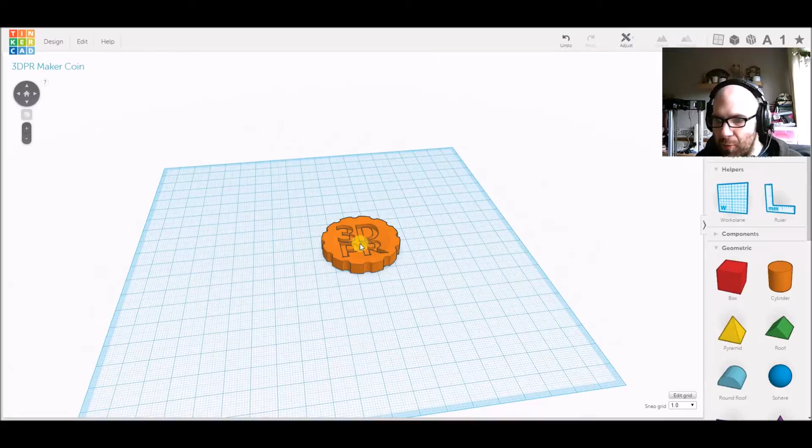You might have just seen there briefly as it loaded up. So what I'm going to do is duplicate this design here, and that's just going to open a copy up so that we can have a proper play with it.

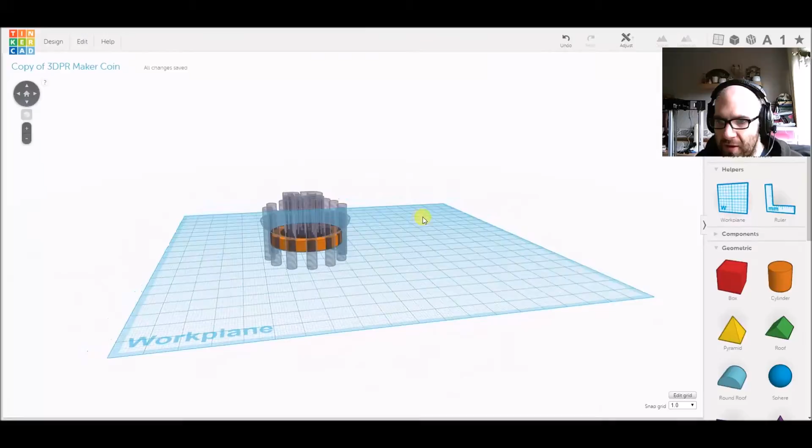So if we ungroup that, then you can just see all those. Okay, so that is basically what goes into making our coin.

So what I'm going to do is basically work backwards. Let's take the first thing, or the last thing that we added, and that was the dish shape into the top of the coin.

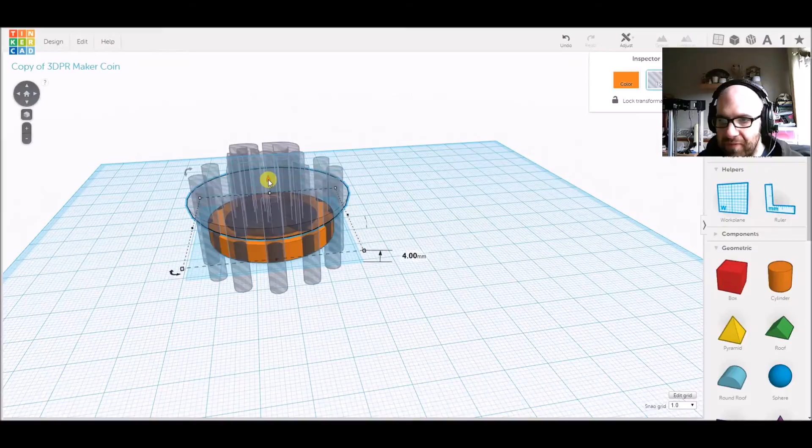I'll show you a picture of the finished coin after I've gone through all of this, because I've already printed it. So if we just raise that up, you can see what that looks like.

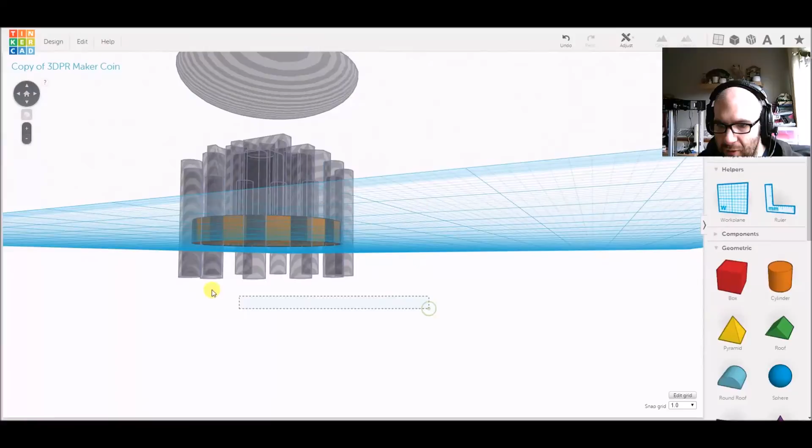The next thing we've got here is these tubes, or the cylinders, and these are actually in pairs. So if we try and select all of those, what I'm actually going to do is group them together. If I group them together, there we go, that's fine. So I've grouped those together.

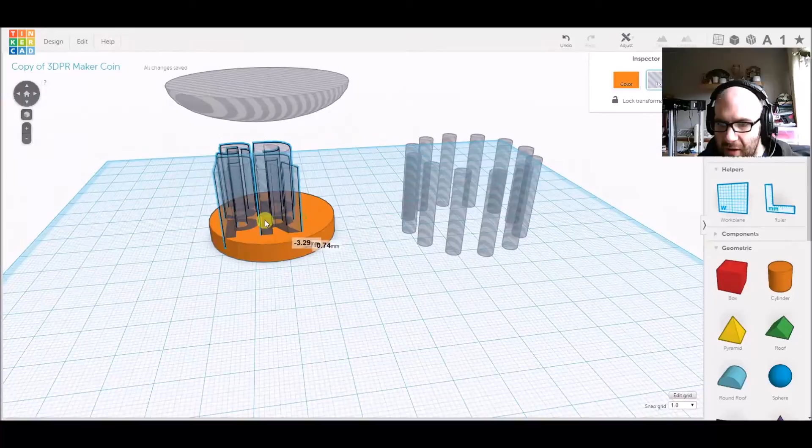Let's move those out of the way, and then we've obviously got the actual logo for 3D Printing Reviews. So let's move that across as well, which just leaves us this original disc that we started with.

So let's basically put those things back together, and you'll see what the finished coin looks like after we've added them in. So let's undo.

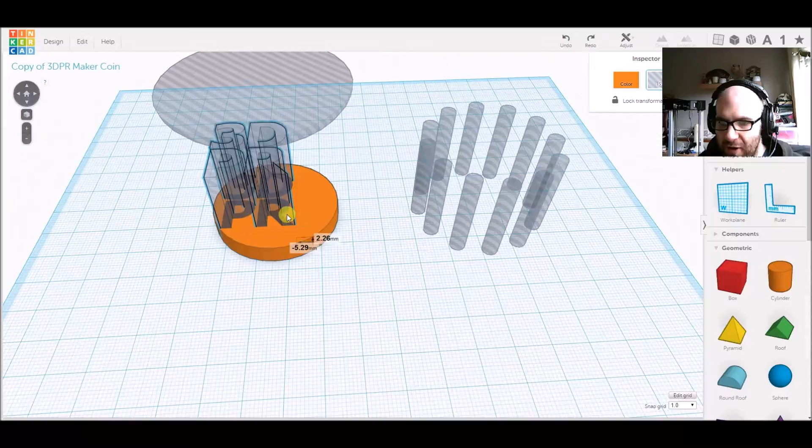So we've added the logo back in, and actually I'll just show you a quick feature that I sort of knew about but never really used until I watched Chuck's video.

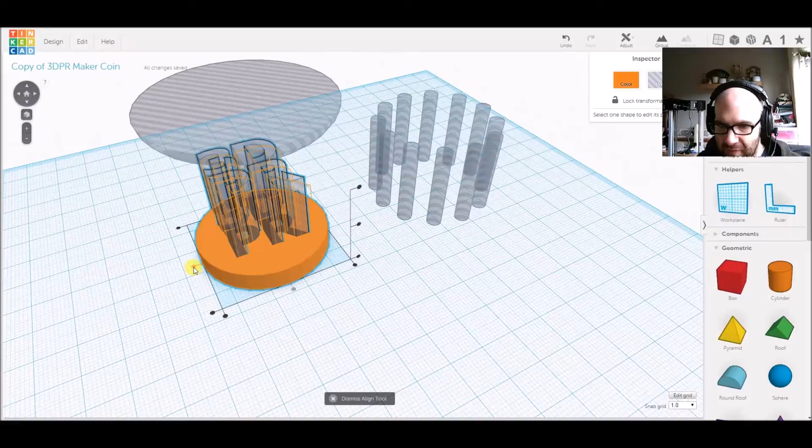So if we select both of those and go up here to align, and then align again, it brings up these dots, and basically that will allow us to align these two shapes on these axes. So if we click that one, it puts it in the middle of this row, and then again in the middle of this row, and then that is perfectly in the middle for what we want.

It's a really powerful feature, but done in a simple way, which is what I really like. So it's not really going to change much, so if I just undo a few we'll get this back to where we want. So let's add in these.

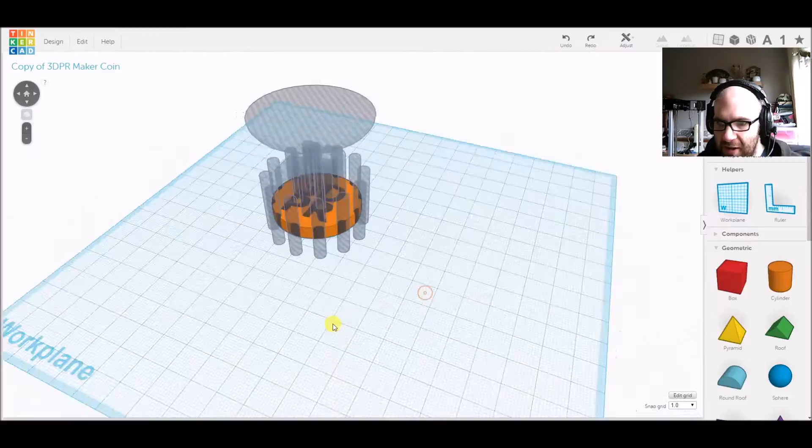So these were basically what we did here. Like I say, they're paired originally. So if I just go around and put these as all as holes, because it undoes that when you group and ungroup.

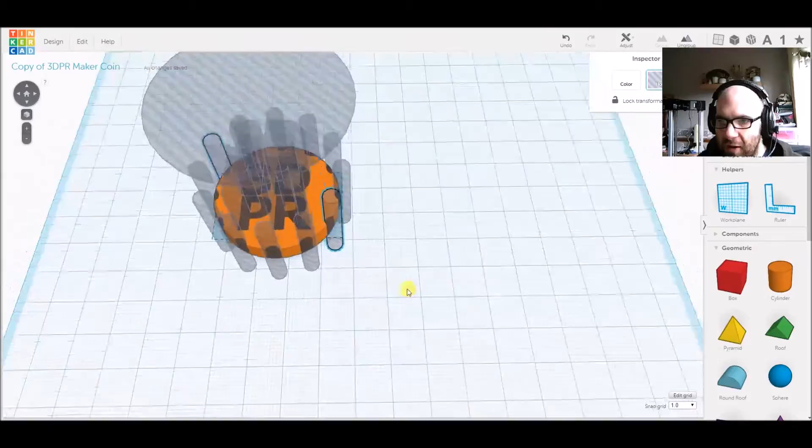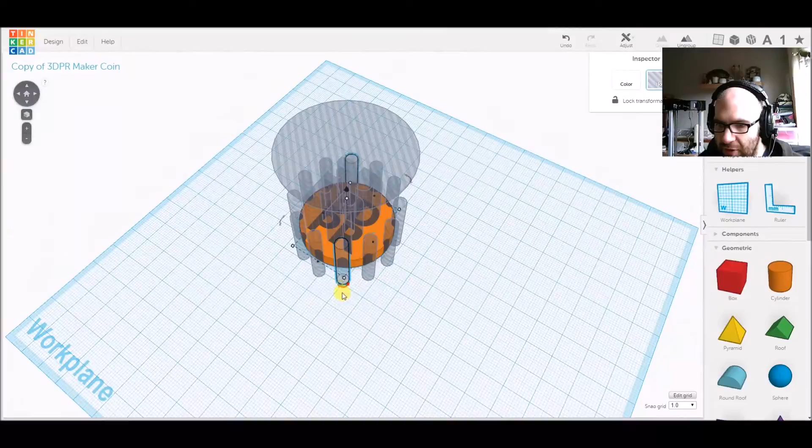Okay, so if we look at just two of these, these are cylinders that we've placed around the edge. We place one at a time, duplicate the cylinder and move it across to the other side, and those two are then grouped together. They're a pair. Then you duplicate those, shift them around 30 degrees, and that gives you an equal spacing all the way around your disc shape.

So we do that with all of those cylinders. The last step for me, I think Chuck did one extra thing on his and added a bevel, but I didn't like the shape it gave you on the edge there, so I didn't do that.

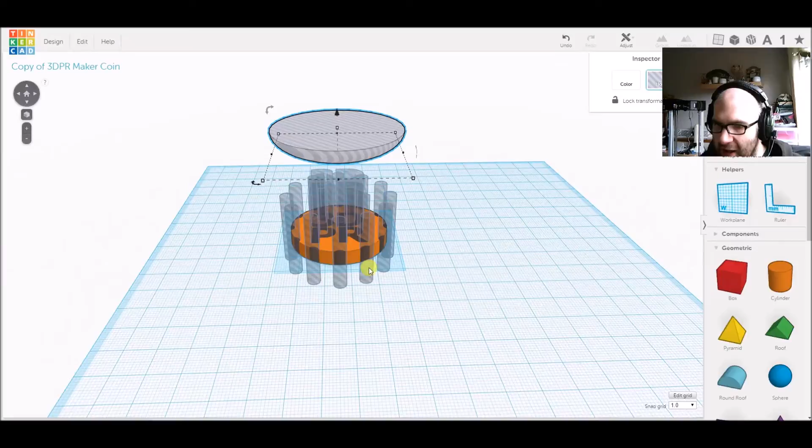But the last step for us was just to pull this down and decide basically where we want it. I've done it there so it covers the whole of the logo, giving us just a small border around the edge. So what we do is select all of those, group them together, and there's our finished coin.

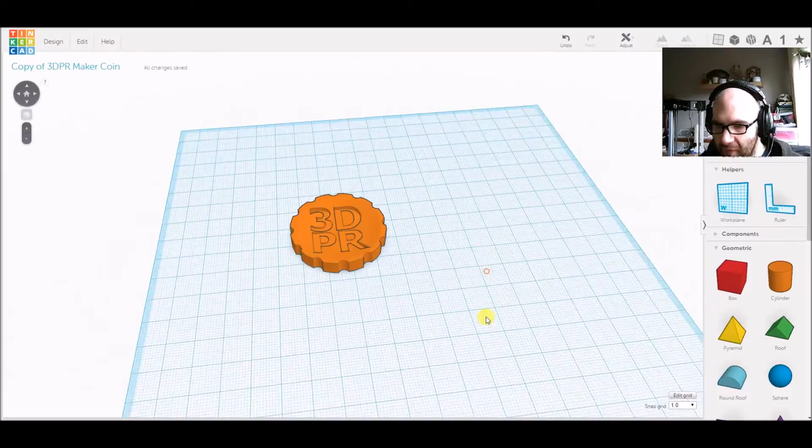As you can see, it's got a nice concave shape. So yeah, that looks really nice.

So what we'll do now is switch over and I'll just run a quick time lapse of the maker coin being created, and you'll see I had a little bit of a, not an error actually, because it worked out, a happy accident, I think is what Bob Ross used to call it.

Basically what we've got here is I printed them in gold Extrude.ltd PLA, but what I've been doing is using up sample filaments that I've got around my collection just to make space for the spools.

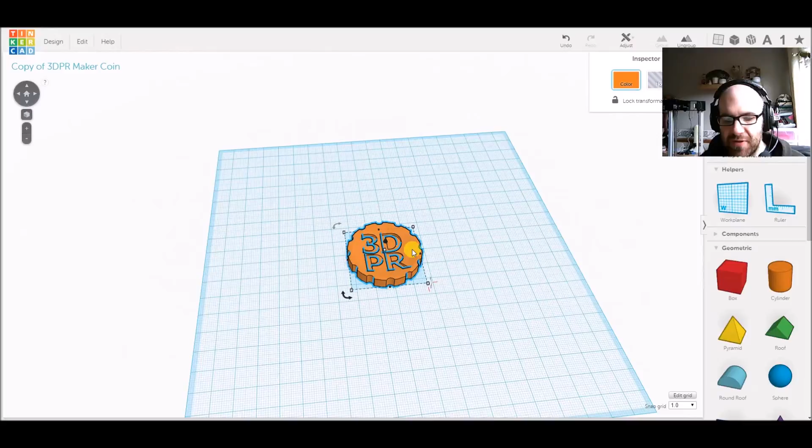Unfortunately, I didn't quite have enough gold filament, and I could see it was going to run out on the last one or two coins. So what I did is I switched in some silver Extrude.ltd PLA, and it actually came out really nice, came out as a nice feature. So let's run that time lapse, and then we'll cut back and have a look at some close-up images of the actual coins.

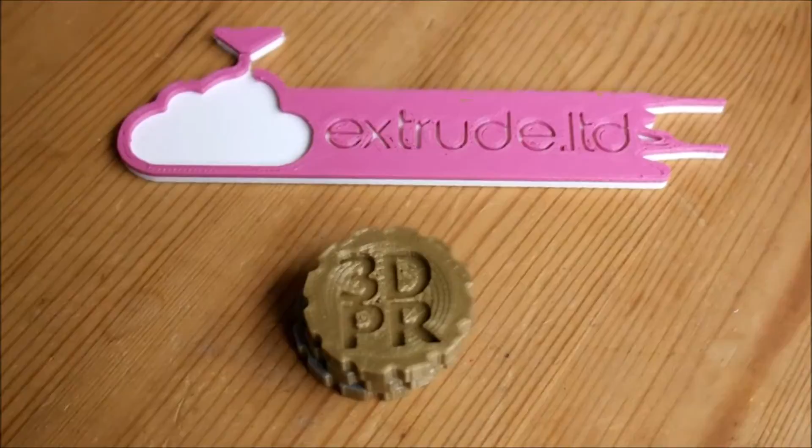Okay, hello everyone, and here we have the finished 3D Printing Reviews maker coins in gold, and in a second you'll see silver Extrude.ltd PLA. So yeah, let's take a closer look at the finished coin.

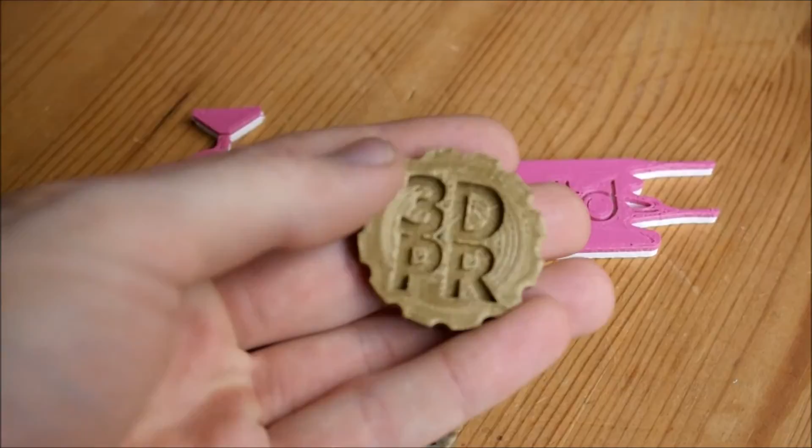As you can see, it's not like a coin size as such, it's more of a small token I suppose that you'd get. This one you can see is in complete gold. Just let the camera, there we go. It's got a nice little shimmer to it, which I quite like about this PLA.

But as I said in the tutorial part of this video, I could see that as this was finishing, I was going to run out of the gold PLA. So I swapped in some of the silver Extrude.ltd PLA I had. While this one didn't get a complete top layer of silver, it still came out quite nicely, with a nice shimmer around the side.

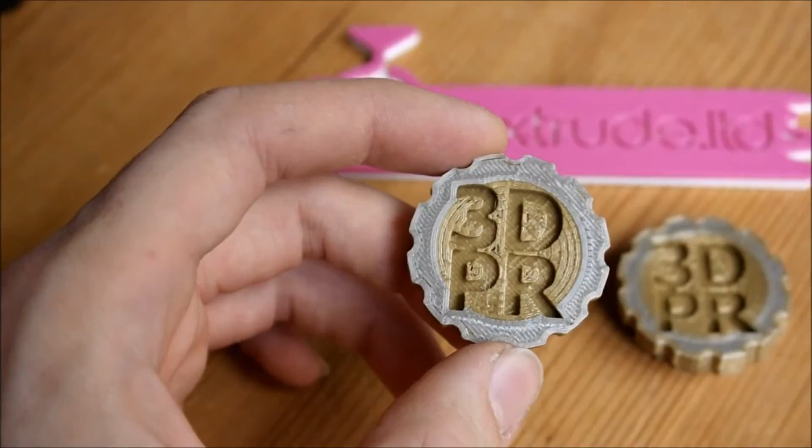But the last one, which got a complete top layer of silver, just looks excellent. Very much like the British £2 coin, a two-colour, two-metal coin. I think that came out really well, I'm really happy with that. Beautiful bottom layer too. Yeah, so that came out really nice.

So yeah, that's about all for this video.

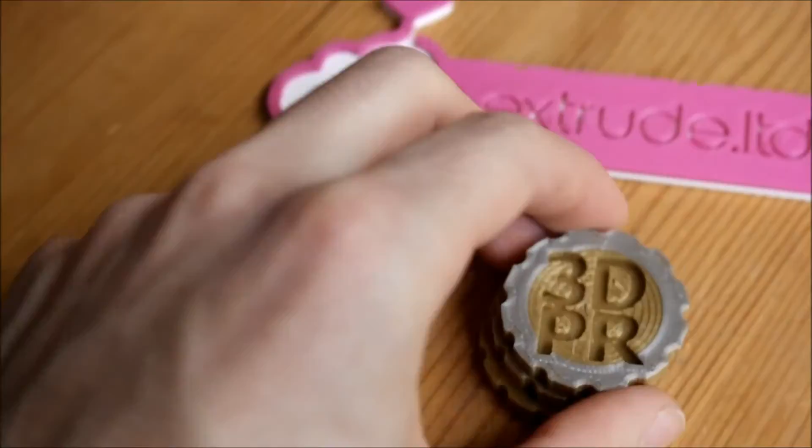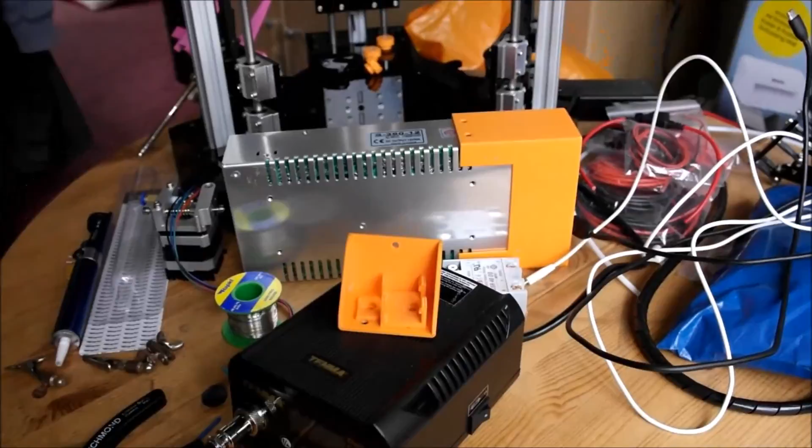Next week's video will probably be returning to the Endfire 1. I'm currently doing a bit of electrical soldering at the moment. If I just pan out a bit, we can see here we've got the solder and iron out, some solder etc. So I've just been playing around with the connectors that we're going to be using to attach some of the heated bed wires to the SSR and the power supply. I've desoldered the polyfuses from the ramps board etc.